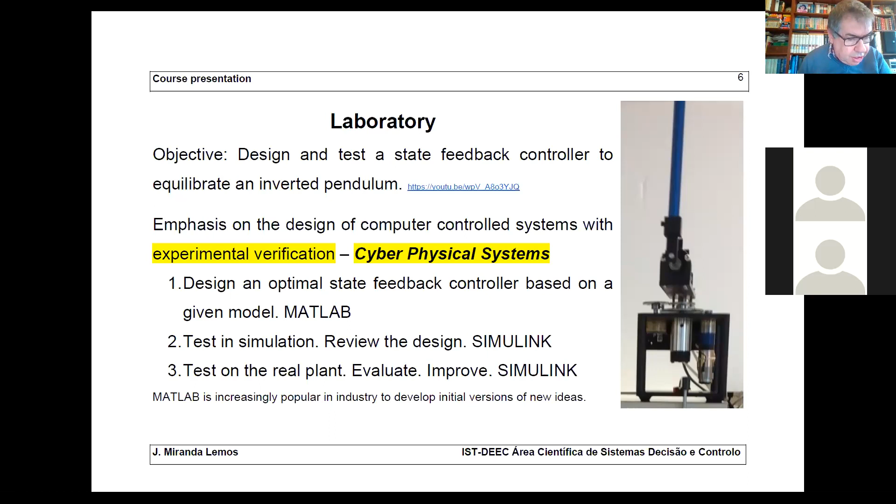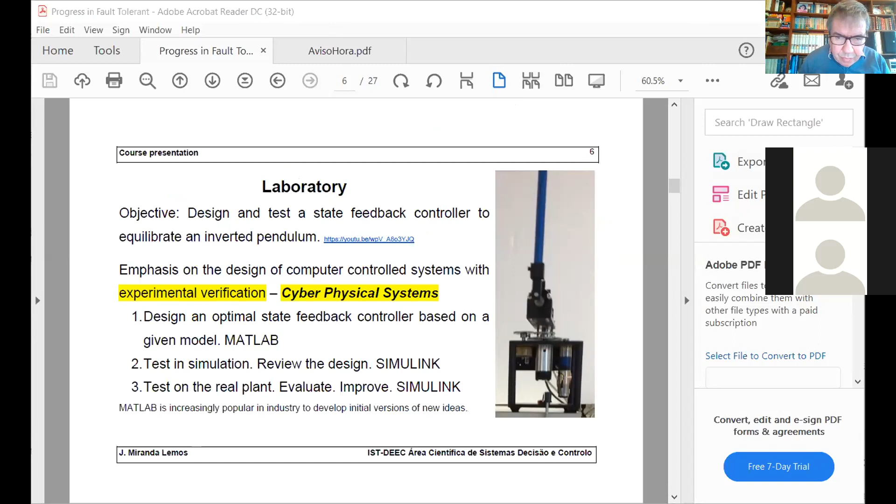Okay, let's say something about laboratory. Let me change for a moment the... okay, you can see my slide, slide number 6? Yes. So what is the objective? The objective of the laboratory is to design and test a state feedback controller to equilibrate an inverted pendulum. Now, we have one difficulty because this year, at least in the beginning, the work has to be made virtual, so by software.

And the guide is organized in roughly 2 parts. In the first part, you design and test everything in software using MATLAB and Simulink. And in the second part, you test on the real plant. You can see here a picture of this inverted pendulum. I will show it to you working. Can you see the movie?

Okay, so the idea, well, here this is sweeping around. The idea is to keep it still. I made it sweeping around because otherwise the movie is very sad, because it's just a stick in the vertical, moving very little. In this way we move it from one place to another, and that creates some disturbances. Okay, let me stop this.

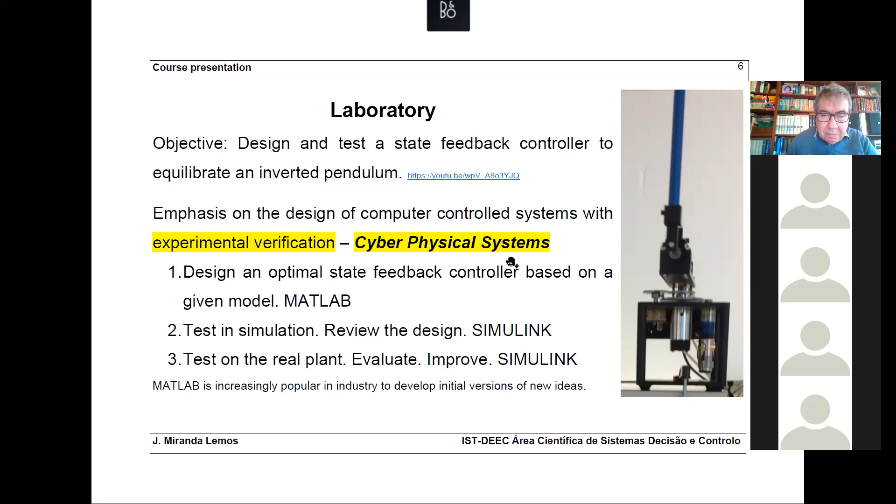So this is the lab. Any question about the lab? Okay. Now this is when you see this word in bold: cyber physical systems, that come from the interconnection of computers and mechanical and physical systems, in which you modify the physical characteristics of the physical systems by computation. Okay, this is a very simple example.

So there was a professor called Abreu Faro. Maybe some of you have heard about him. He was at the basis of the renewal of teaching electrical engineering in Técnico in the 60s. And Professor Abreu Faro was teaching propagation of electromagnetic waves, so Maxwell equations, this stuff. And at the time, there was a course during the day and a course during the night for students that worked. Professor Abreu Faro was giving the lecture in the morning, but his colleague who was teaching at night had some impediment, so asked him to go and give a lecture.

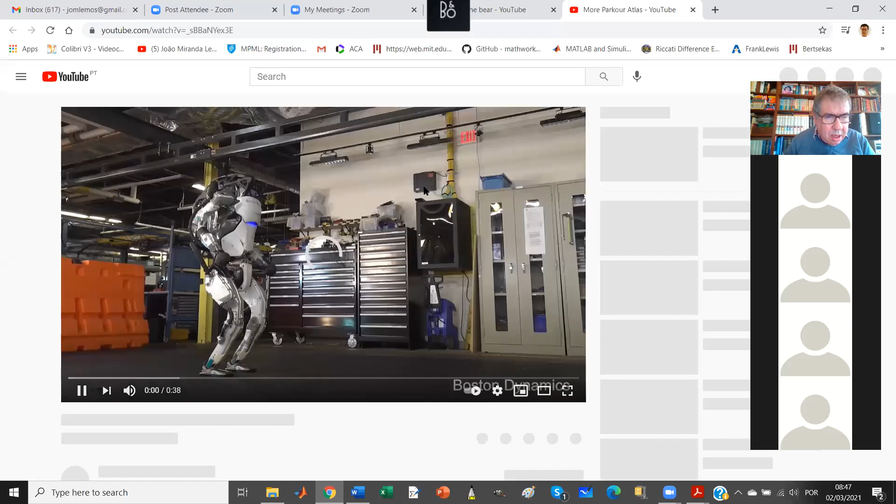Let's see one example. Probably you know something similar. Can you see the movie? Yes. Okay. So this is manufactured by a company known as Boston Dynamics. And you might say, well, but this is artificial intelligence. No, it's not. The controllers that allow you to do all this stuff are feedback controllers, and the type that you are going to study in this course. And it's model based.

Okay, it's quite impressive. If you can later give a look, make a search by the keywords Boston Dynamics, and you will find striking videos. Okay.

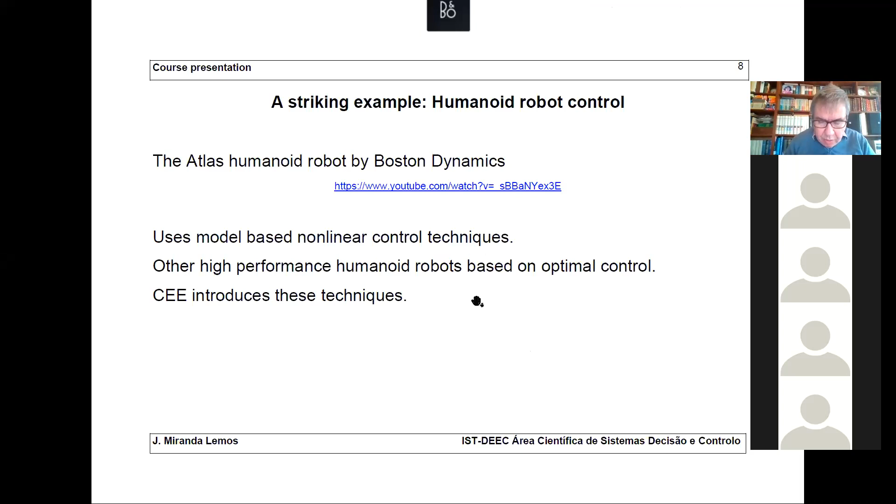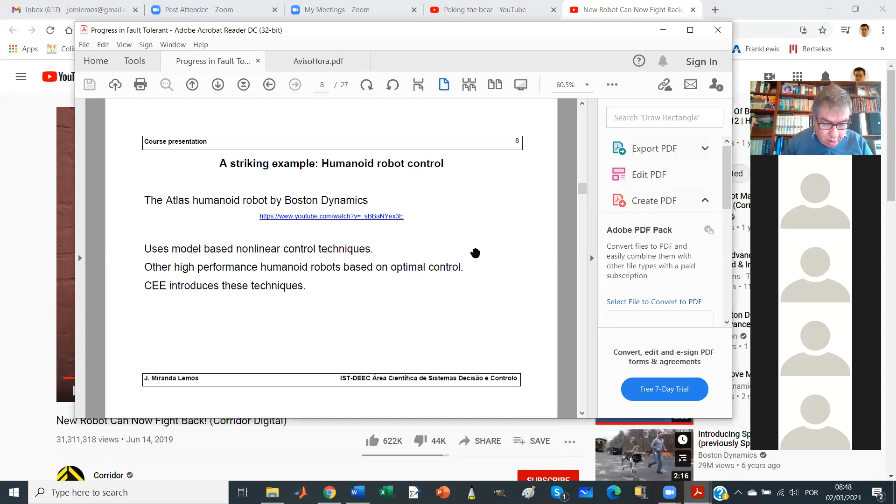Sorry, Boston Dynamics is, I have to, it's my, let me stop this stuff. Okay. Okay.

Now, we have already discussed this, but here you have some computation. So suppose that you have a small material point, say a magnetic sphere, and you apply a force by electromagnetic force. So you apply a tension to a coil around an iron core, and it attracts the small ball, which is subject to the force of gravity. Now, suppose that there is an extra force that I'm not representing here that corresponds to compensating the force of gravity.

So the equation will be the mass times the acceleration, y is the position, so the second derivative is the acceleration, is the force u. So I'm canceling out the force of gravity. And then this is a second order differential equation. I say, well, the mass is 1, just to concentrate on the essential. So we have a second order differential equation. We have a second derivative.

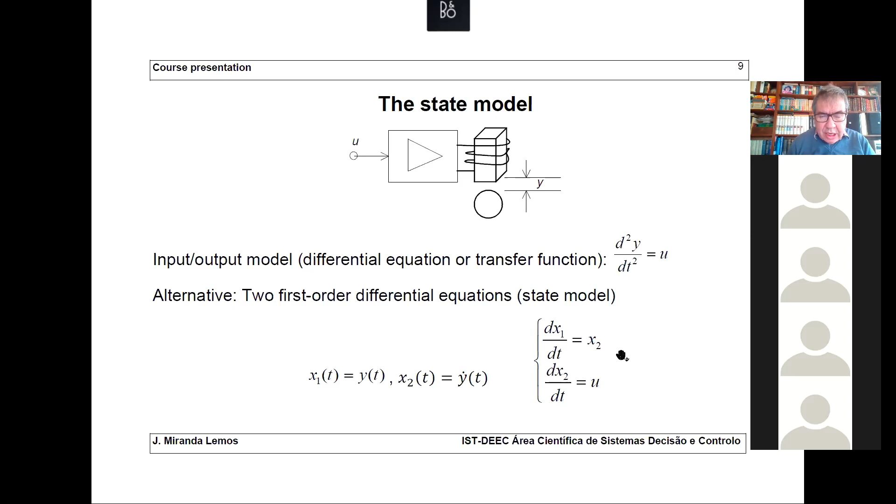One thing that we are going to study is how to convert models. For instance, I give you a transfer function, and from the transfer function you get a differential equation. That is very simple. Probably you know how to do it, but we are going to review it if you don't remember. And then from the differential equation, how to systematically write these equations. So you have replaced one second order equation by two first order equations, the state model.

In general, in the linear case, you have a vector x, and you have a set of first order differential equations. A and B are matrices, x is the state, and u is the vector of manipulated variables, the so-called control variables, the things that you can impose from the outside.

And then you have an output, which is a linear combination of x. So suppose that you measure just one variable, and so C is a row vector and x is a column vector. So this gives you a linear combination of the elements of x. So this is the model in the linear case.

Later we will generalize this model to the nonlinear case. In the nonlinear case, we are going to say that this is just a function of x and u. It can be a nonlinear function. In the linear case, there are a number of properties about the solutions of this equation. And actually, the first chapter will be about studying this equation.

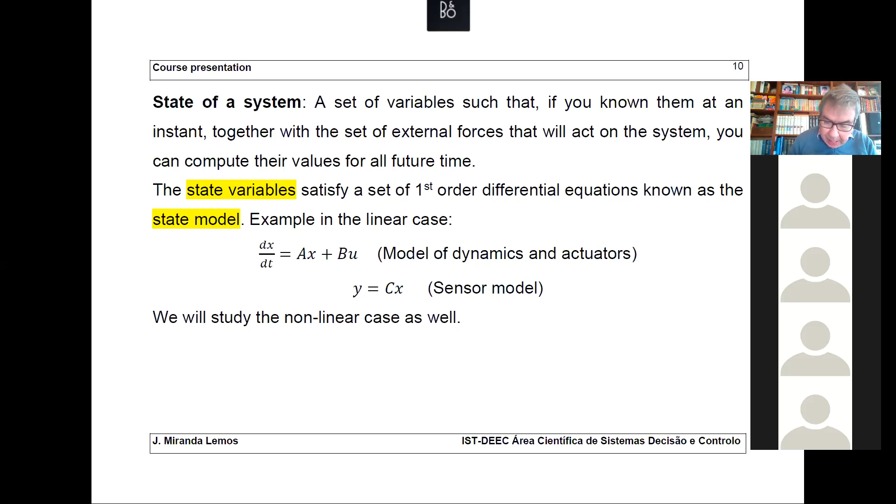Okay, so this model is quite practical to use with multivariable cases. So in the multivariable case, you can use this. In the nonlinear case, you can also generalize this. Okay, so these are advantages with respect to the models based on the transfer function that you studied in your basic course on control. Any question? Okay.

If some of you buy the book or have access to the book, I suggest you read pages 21 and 23 about general comments on this. Actually, the story of how we were led to using the state model is quite interesting. And it's related to space exploration. Okay, I'm not going to tell it, but when it appeared, it was a kind of revolutionary concept.

And up to the end of the Second World War, control was based on transfer functions, the so-called servomechanisms, used, for instance, to point or to move guns, os servomecanismos usados para movimentar canhões.

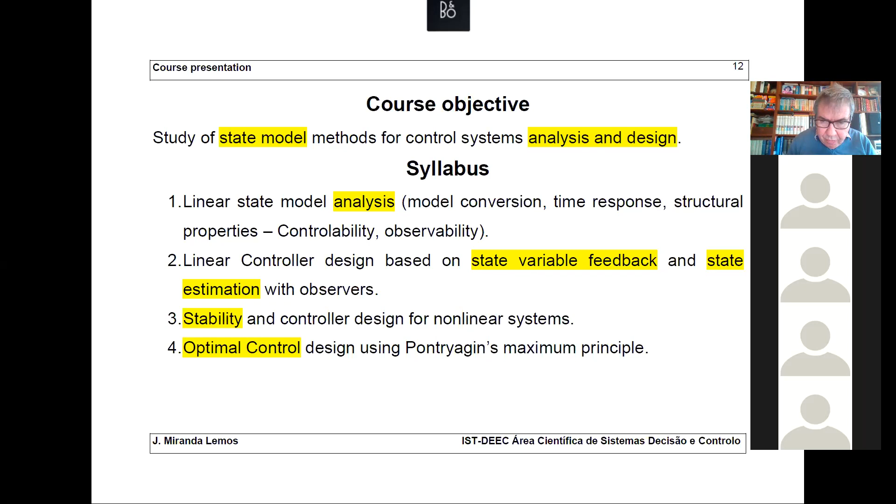Let me spend some minutes giving you a number of examples of problems that we can solve. This is a list, and you can later see it with more care, of the new things that you are going to learn in this course. Some of these things, if not all, are among the most important concepts of control engineering. You have Lyapunov's direct method to study stability of nonlinear systems and even to design stable nonlinear controllers.

Pole placement by linear state feedback, so imposing the poles by linear state feedback, and estimating the state with the Kalman filter. The Kalman filter is one of the most striking inventions of electrical engineering, not only of control engineering. Pontryagin maximum principle, multivariable control, and a glimpse of adaptive control based on Lyapunov's direct method. So these are maybe the main new things that you are going to learn here.

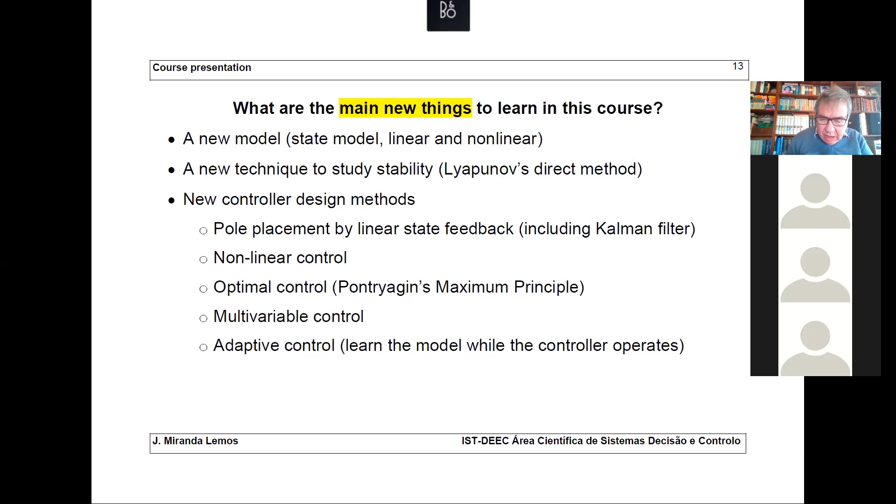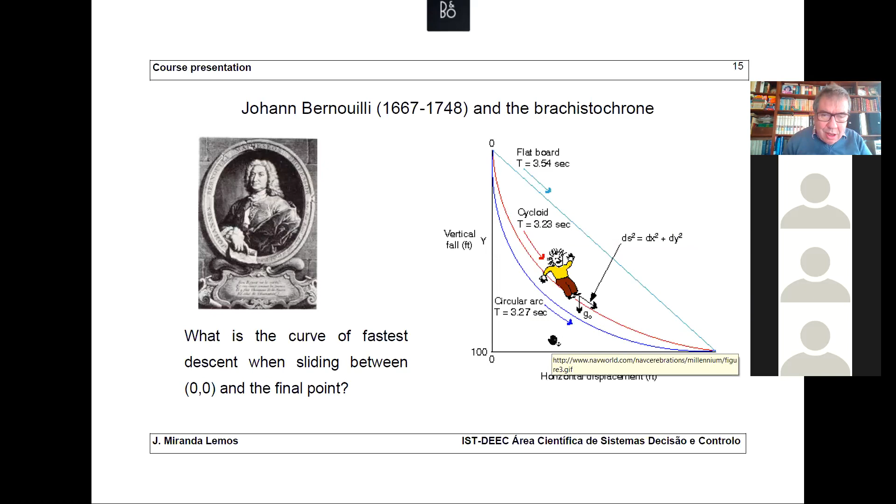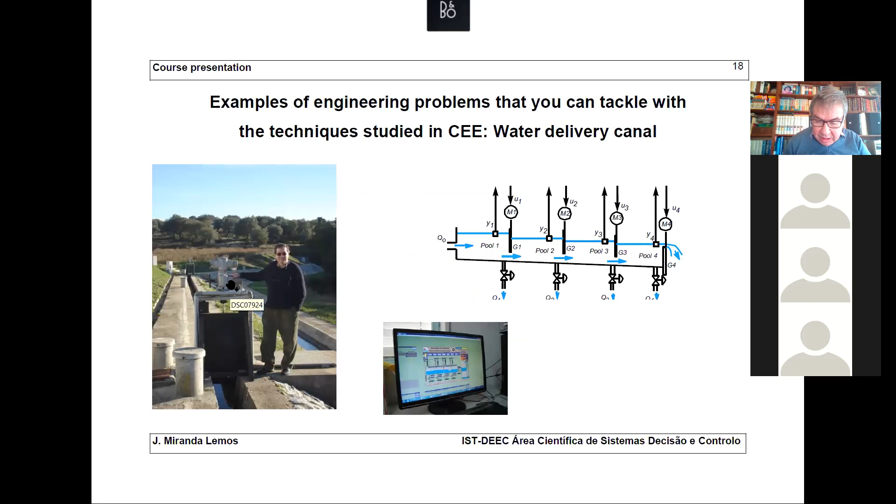If it starts doing maneuvers like this, opening and closing, the motor becomes very hot, and there is a thermal protection that stops the motor. Also, the level of the water here was close to the border, and you want the water not to overspill. So with separate PIDs, you got an unstable system. This is the type of system that you have, for instance, in Alqueva, by the way.

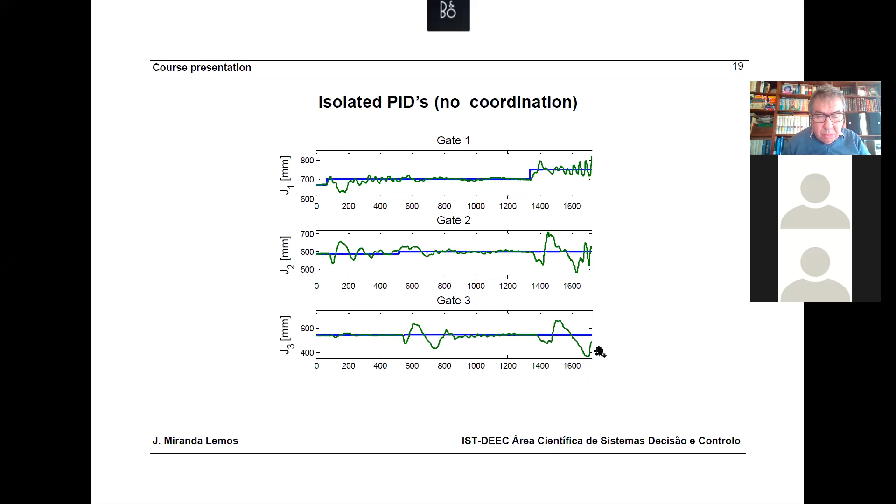Now, suppose that you have a multivariable controller designed with the techniques that you are going to study in this course. You can see that before you were operating for about half an hour. This is time in seconds. 1 hour is 3,600 seconds, so this is a little bit less than half an hour. But here you have 10,000 seconds, so something like 3 hours.

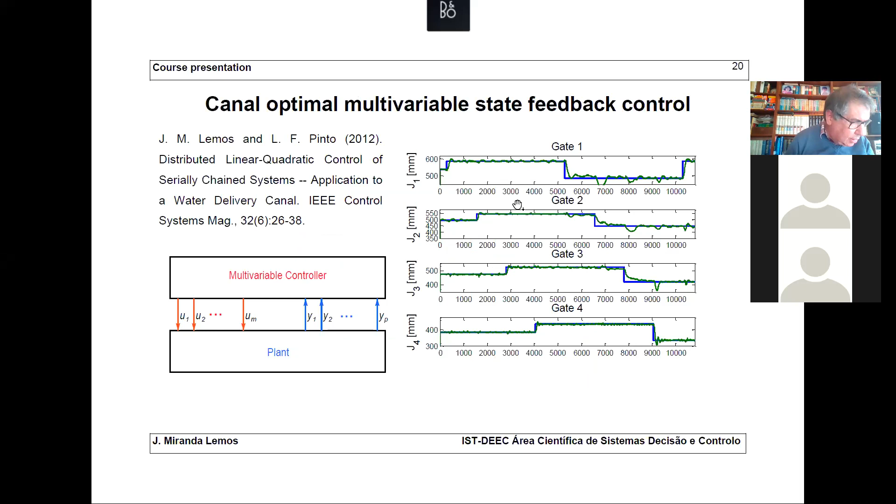And it's operating and going and going. So I have examples for a whole day of operation. Not a whole day, but a whole night, say 11 hours and so on. And this uses the techniques that you are going to study.

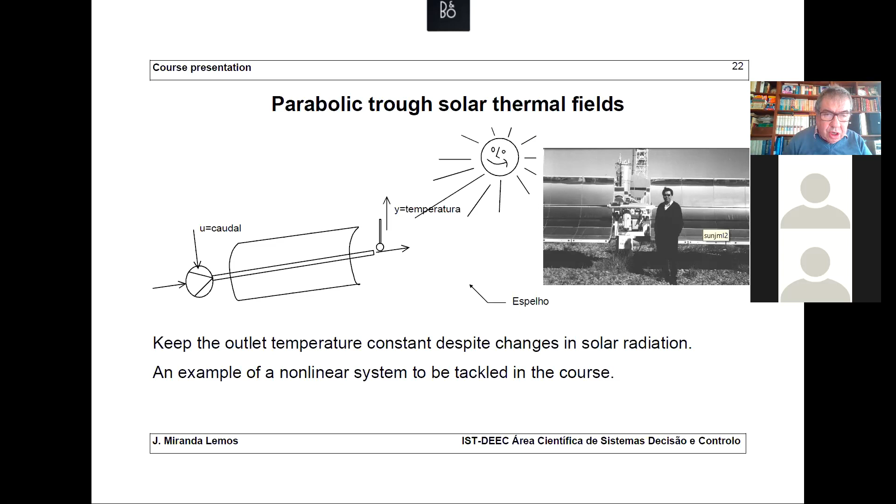And finally, controlling anesthesia. You have a patient and you want to control the level of paralysis of the patient. Anesthesia is not only about making the person asleep, and for that you can also have a controller, but also preventing the person from having involuntary movements. For that you measure the muscular activity. There is a sensor here in this hand. These electrodes are connected to an instrumentation tower that measures the muscular activity.

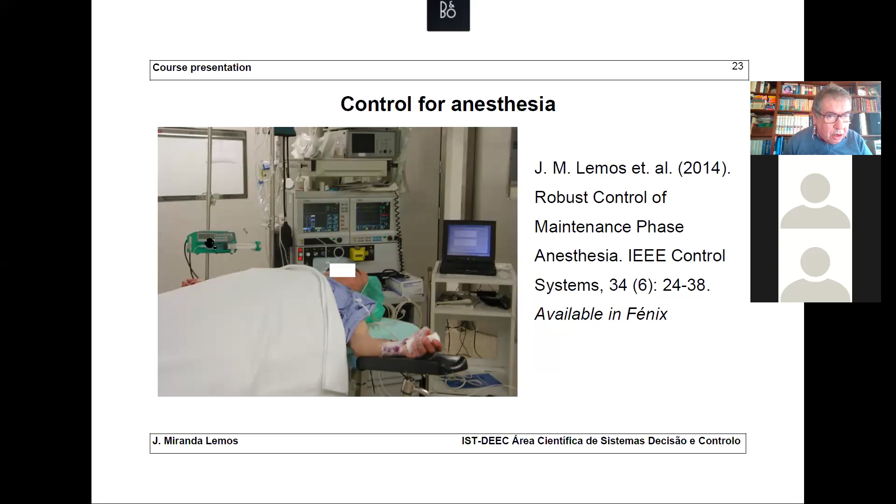And then you have an actuator, which is this syringe connected to a computer. You can recognize here the screens of MATLAB. So you measure the muscular activity, then you have a controller implemented in MATLAB, and you give an order to the syringe.

You can also do it with the level of loss of consciousness. 100 is the way we are, awake. 0 is deep coma, and you want to drive the person to a level of loss of consciousness which is about 50. So you are manipulating the rate of administration of a drug using a syringe, such that you are close to this set point at 50.

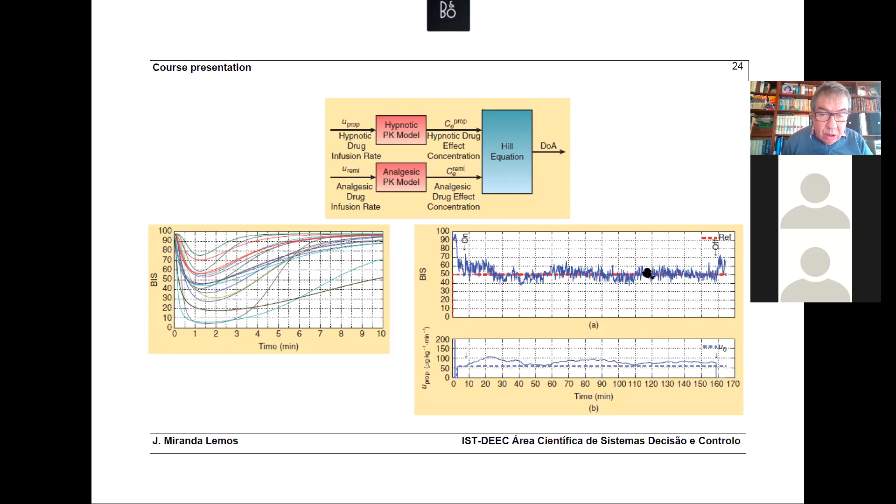This blue line is the measurement using the EEG of the level of loss of consciousness, the degree to which the person is asleep, in rough terms. And you can design these controllers using the techniques that you will study. Finally, optimizing the control for sea wave energy. That's another important example.

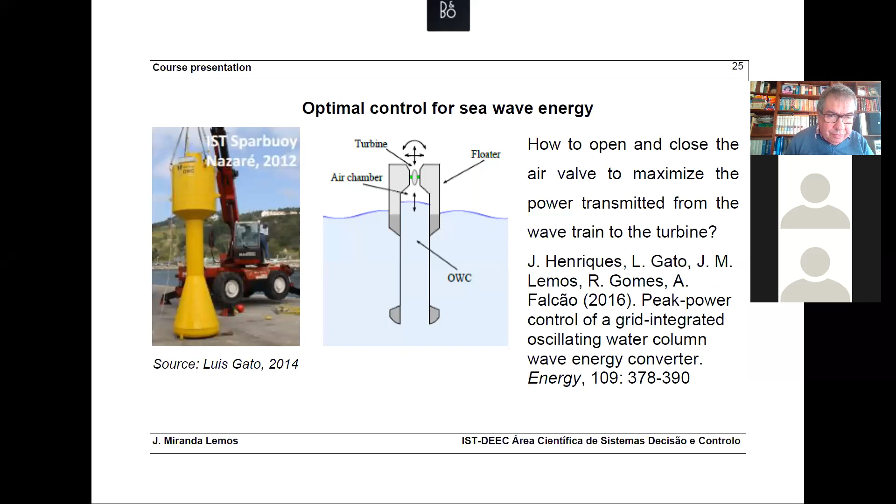There is this sentence of Boltzmann, who developed the theory of gases: there is nothing more practical than a good theory. That's what I would like you to feel at the end of the course.